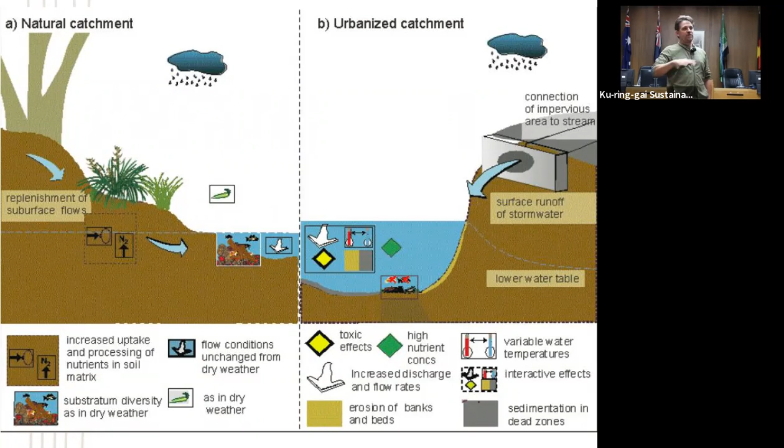I'm going to quickly flick through this, but generally when we urbanize, we have impacts, including poor drainage. When we change from a forested catchment to streets, roads, houses and hard stand, we change the way the water cycle works. Instead of water soaking into the ground, that hard stand runs off quickly. We also cut into steep blocks, cutting into sandstone and changing the way water flows over the top of that sandstone. So when we develop, we create these water management issues. Particularly when houses were built 50 years ago, the practices we do now weren't what we did then, so we manage the way water moves through the site differently now.

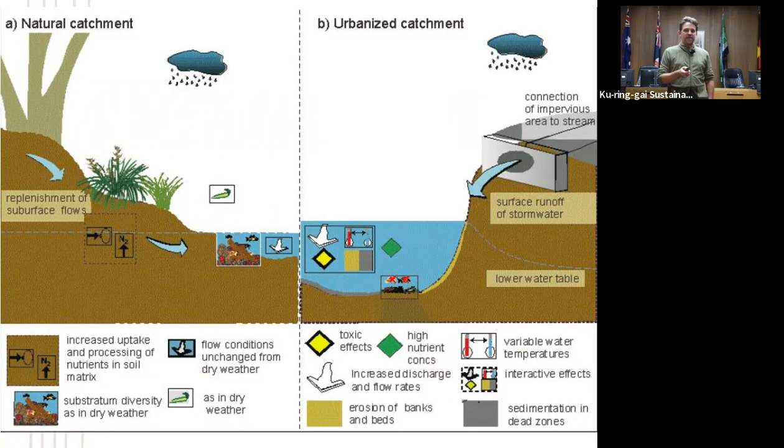I'm going to flick through that. The second part of sustainable water management, as well as managing it for the waterways, is drought response and drought management. It's kind of off the agenda at the moment because all the dams are full, but if you lived in Sydney through the noughties, you'll remember it.

What we do is dam all of the Upper Nepean rivers - Cataract, Avon, all of those are actually dammed. So we've had a massive impact on all those waterways on the surrounding fringe of Sydney to supply us with water. Warragamba Dam is the biggest, but there are 4 others on the Upper Nepean rivers. We have significant impacts on these waterways, completely altering the way they work from an environmental perspective. The more we can use water locally, the less impact we have on these waterways, and the more we can release environmental flows from them to improve these waterways.

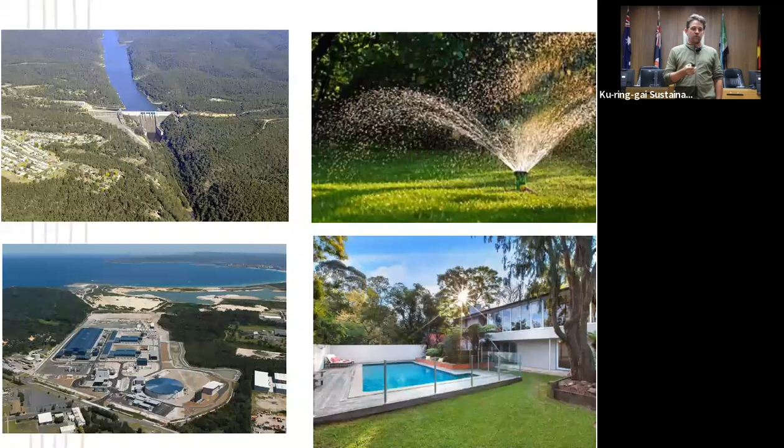So it has an impact on our region. And obviously the desalination plant produces water through consumption of energy, and given climate change and the cost of energy, it's important to limit the amount of energy we use just to use water.

I'm going to fly through this quickly, but if you have interest in this, just ask questions. I think there's a lot of interest in drainage and water management, but if you're interested, this is important for when you want to use water in the home and how to save water - how you actually use water in the home. So the first thing is to understand how you use water in the home.

The washing machine, the shower and bath, the taps and toilets - all of that is what we call non-potable. That's all water you don't actually need to make drinking quality. What that means is that's a good source you can use for rainwater tanks, for example. If you can supply all of those non-potable uses with rainwater instead of mains water, all of a sudden you can change the balance.

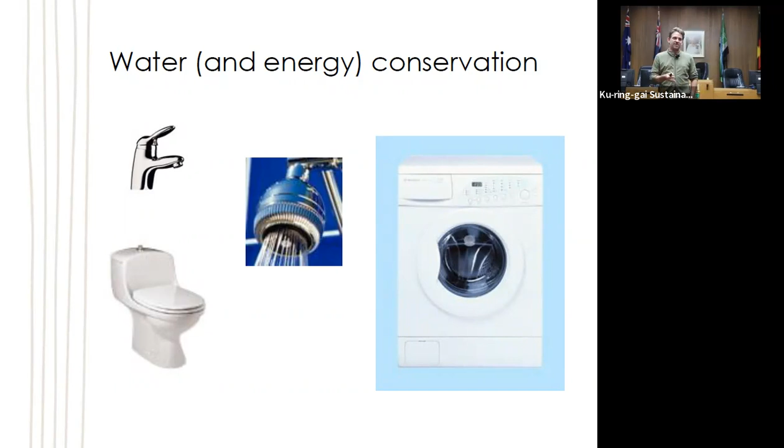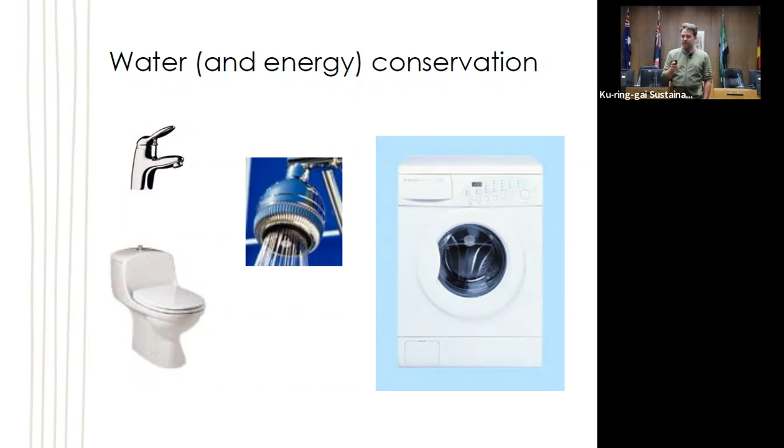Conservation - if you lived through the noughties drought, you would have seen all the water saving shower heads. But that's the first thing to do. If you're replacing a washing machine, old clunker washing machines use 150 litres per wash, while new ones use less than 60. So buy water and energy efficient appliances. Don't go replace things if they're working and you don't need to, but if you're looking to replace it, definitely look for the water drip indicator - look for 4 or 5 drips.

Pools - anyone have a pool? Pools are a huge water user. If you have a pool, you typically use 20% more water than the average home in Sydney. So supplying that with rainwater is a possibility. Pool covers are a bit annoying, but they do save water.

Does this look familiar? We have big lawns like this - these are obviously big water users, compared to this, which is a much lower water use environment. So there's been a big change, particularly over the last 30-40 years, towards using more natives.

I'm just going to quickly fly through that. One thing I want to talk about is drainage issues - particularly if you don't have well-drained roofs. Does anybody have downpipes that aren't properly connected to the stormwater system underneath and are just flowing out over the top? Does anyone have overflowing gutters? Has everyone noticed their gutters overflowing in this period?

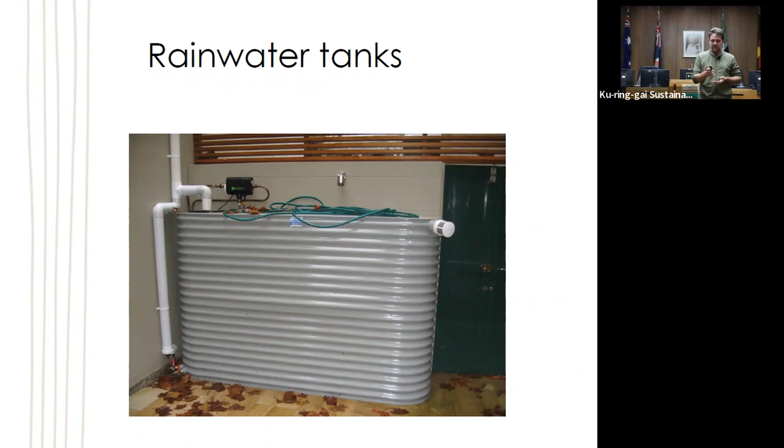I've talked about this - the key message for rainwater tanks is it's really about what you plumb it into. You use a rainwater tank much more effectively by plumbing it internally.

I'm just going to flick through these slides. We use these little cheat sheets, and for those of you interested, we can provide the slides for this - all of these slides, you can get this information. This is our little cheat sheet for how to set up a really quick little rainwater tank scheme.

Harvest at least 100 square meters of roof - don't just put it on your garage that only gets 5 by 2 square meters. That's not big enough. You want to get at least 100 square meters of roof.

And if you're not sure how to work that out, you can actually go into Google Maps and measure there, or Six Maps if you know that one. Both of those have little measuring tools, so you can measure your roof.

Then have at least about 5 kiloliters if you've got a single dwelling with a garden, or if you've got 4 or 5 people in your house. If you don't have much of a garden and there's only 2 of you living there, you'll probably get away with 2 or 3 kiloliters.

And then connect to at least 3 uses - that might be your hot water system, washing machine and toilets, or washing machine, toilets and garden. If you set a scheme like that, you'll save a lot of water - about 50% of your water use.

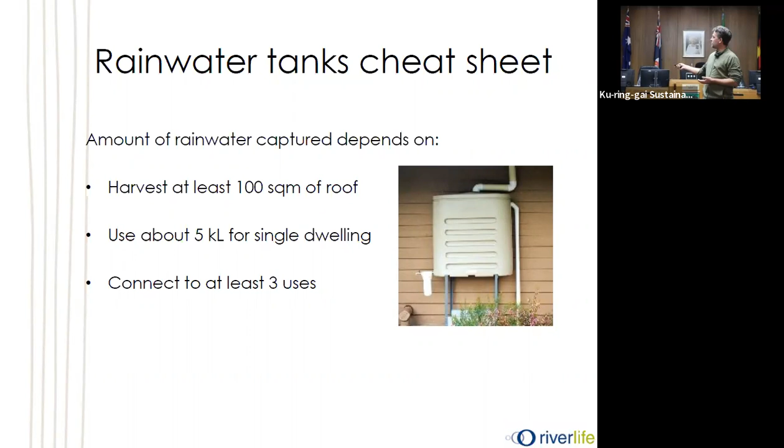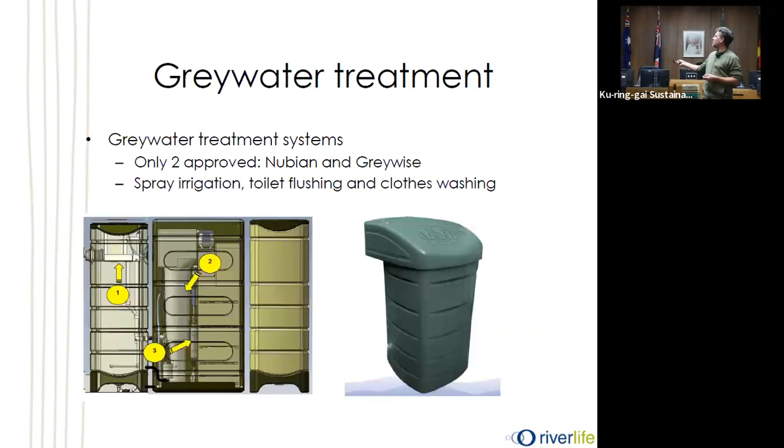So a very simple little cheat sheet for how to set up a rainwater tank. I'm going to skip through greywater reuse - is anyone interested in that? Nobody's interested in irrigation at the moment. I'll come back if you are - we can come back to greywater reuse.

So I'm going to start to talk about how we manage water on the property now, and different ways of managing water. It's almost like living with water - sometimes it's best not to fight water.

If you've got a spot that collects water and is damp all the time, it's actually better than trying to fight it, particularly because some of these drainage problems are very hard to solve just through drainage. It's very hard to put a stormwater pipe in somewhere and drain that water away, or it can be very expensive to put in subsoil drainage.

That's drainage that's actually below the ground. So it's often better to work with the water and create the landscape the way the water wants to work. As I said at the beginning, not every one of these devices may appeal to you - the idea is that 1 or 2 does.

So wetlands and ponds are a way of dealing with that spot where you've got lots of water coming in - one thing to do is create a feature out of that and have a pond that works in that space, directing water deliberately into that space and having water there.

That could be subsoil drainage, for example, if you've got lots of water flowing over sandstone that pops up where you've got shallow bedrock. Often what happens is water flows through the soil, hits the bedrock, doesn't drain through it, and pops out - that's where it gets wet, where it pops out of the sandstone.

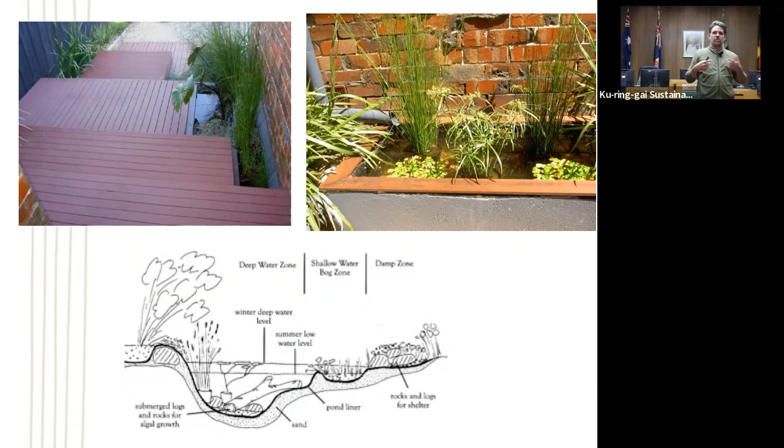Again, it's just a way of managing water, slowing it down. They can also take, if you've got water running off somewhere, they can manage that water as well. So that water that flows off the garden, flows off paving, that can also be directed into the wetland.

I'm going to flip through this one. For those of you interested in natural pool conversions, I'm going to come back to this.

I want to talk to swales, because that's probably, I think, one of the key things about managing water, and the way that we think about managing water, particularly in these wet periods. So swales are really mini creeks. They're a way of managing flows.

So what swales do is they literally take water from A to B. And A is somewhere where you don't want water, and B is somewhere where you don't mind it discharging to. So that's the idea of a swale.

So if you think of your property and think about where water is flowing at the moment - some of you mentioned you have waterfalls and water running through - a swale is how you manage that water through your property. And it's like a creek. It's like designating an area where the water can flow, where nothing's going to be damaged or in the way.

For those of you who mentioned that you've got water flowing through and it's taking out the plants, it's about having that space that's there, so the swale is actually a dedicated zone for drainage. Then that's almost like a sacrificial area. You might put some rocky material in there that moves that water through, but it contains it. So instead of going over a wide space, it goes over a narrow space and it controls that water.

And you can do that on any scale. You can do that at different scales. I'll just show you some examples. So the way that you'll know this just intuitively - you will know swales when you go to country towns.

They're actually physically damaging the plants as it flows along - erosion basically. And also it can just be too wet, and that's about having the right plants in there. If it's just too wet in the swale, you plant plants that enjoy wet feet.

So the idea with a swale is that, wherever this is on the property, it's moving water - moving it from where it can be a nuisance, popping out off the sandstone, or where the house is cut in and disturbs the drainage line - and moving it through the garden in a controlled way. What that does is allow you to keep most of the area outside of the swale dry. It's a way of literally managing the water that flows through it.

And obviously it needs to go with the grade - you can't make water go back where it doesn't want to go. You need to work with the grade. So if you're on steep blocks, you're quite limited; it's going down the hill as to where it goes. That may not necessarily always be useful depending on what's happening in your backyard, but that's just the nature of water.

So again, this is just an example of a transformation. This was about keeping water in the landscape too, for those dry periods. This is an example in Canberra, a backyard where, before these guys moved into this house, they had just a scrappy bit of lawn and it was very dry. For those of you in Canberra, it's got a lot less rainfall than we do in Sydney.

And then they dug out the swale. So this is the swale with the rock lining on the right, with river pebbles and some larger boulders. And then they've just created a little bit of drier landscaping up the top on the right. The soil that's come out of the swale is being built up in this corner here.

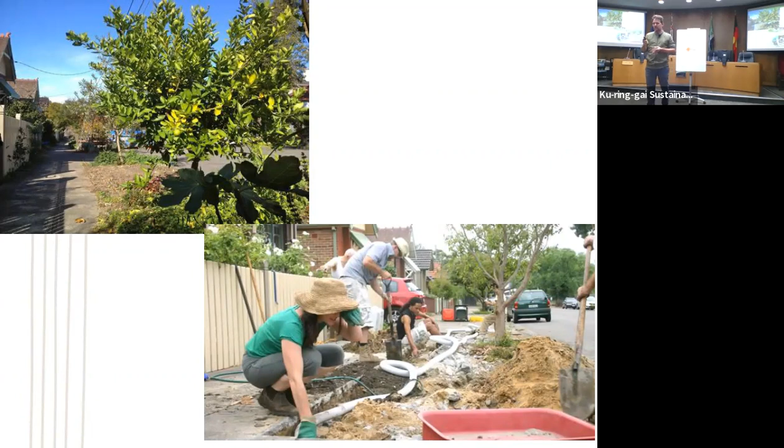Again, this is just the same example. This is Michael Mobbs - those of you who've heard of Michael Mobbs, he's done this in Chippendale. So you don't need a lot of space to do some of this.

Same idea, taking it from terraces. I'm going to flip through this - oh sorry, that's what I wanted to do. I was wondering why I wasn't.

I was going to go back to rain gardens. And this is the house - I mentioned the one about the swale down the driveway. So this is the swale down, that's the garage where it was flowing down. This is the one that I was drawing. So the graded drain is in front of the garage there, and this is the swale coming down by the side of the house. It took water that was previously running through here into a drain and then down by the side of the house, and at the base of this is a little rain garden.

And the rain garden is just that idea of being at the bottom of the swale in a low point, somewhere where water just ponds. What a rain garden is trying to do is get water back into the ground. In this case, we've planted some ferns in there, things that really like a lot of water, and in this case, shade as well. So what the rain garden does is instead of water just rushing off, it actually soaks into the ground - it's getting back into the ground.

To make that work, we dig out, I don't know, half a meter, whatever you can - if you're on bedrock, you might not even get that far. We dig out a bit and replace that with sand, so it's just a soak away. Water fills in, goes into the sand, and then just soaks out and goes away. It's just a way of keeping water in the landscape.

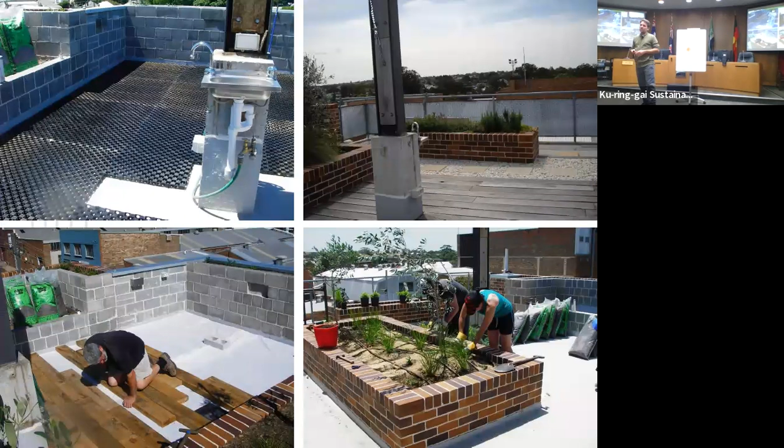But there is an example in Angel Street, Erskineville—if you type that in, it's on a classic 33-degree pitched roof. They generally work better on flat roofs, so when you do it on a pitched roof, you have to really think about it because it can go wrong, and it's hard to maintain. I've seen this one, I go past it quite a lot—they literally have to abseil into it to maintain it. So yeah, on a pitched roof it's much harder.

The other thing about green roofs is they don't work well with rainwater tanks. So if you're doing it to maintain water, a rainwater tank is much easier than a green roof. A green roof, really, we don't recommend doing a retrofit with—it's really hard. They work much better if you're doing an extension or something like a garage that might be replacing the roof. It's hard to put into an existing roof—structurally and with waterproofing, it's quite difficult. So green roofs are very useful, but very particular; we find they only work in certain situations. We've only really done them on extensions, and we've done a very small one on a retrofit.

These are just some examples. So porous paving—this is another way of managing that excess water runoff. If you've got water from hardstand flowing over your property, like a driveway, porous paving is one way of managing the hardstand where you want the hardstand. You can't just return it all to turf or planting—it might be a path, somewhere with seating, a courtyard, etc. Normally, if that's just standard paving, it just runs off, and can create issues in terms of wetness, particularly if it doesn't drain very well.

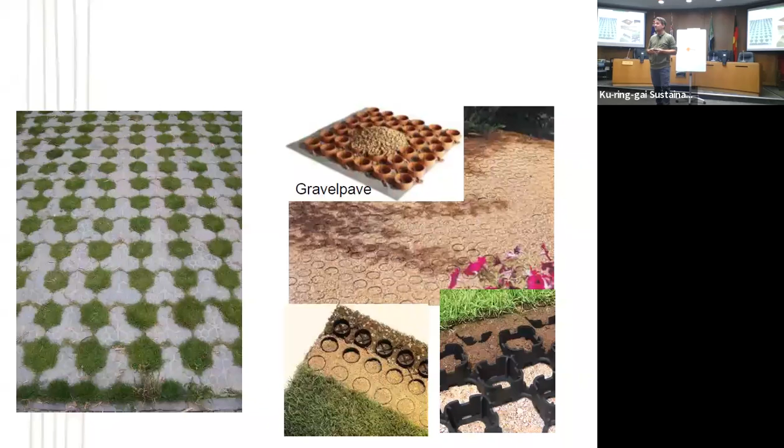But they're actually better than normal pavers. Well, sorry, let me clarify that. These pavers are no different to any other paver. If you've got an area that doesn't get much sunlight and gets damp or lots of runoff off it, this will be like any mossy paver that you've got at the moment - it won't be any different. This one is actually better because it drains through, so it doesn't stay wet - they actually dry really quickly. So this can actually help manage if you've got a slippery area. This type of porous paver, like the Hydroston, there's a couple on the market - I think Boral have one, Hydropave or something like that. They're actually better for keeping the pavers dry.

Who has slippery pavers at the moment? Has everyone got some? I've got slippery concrete at the moment in one spot.